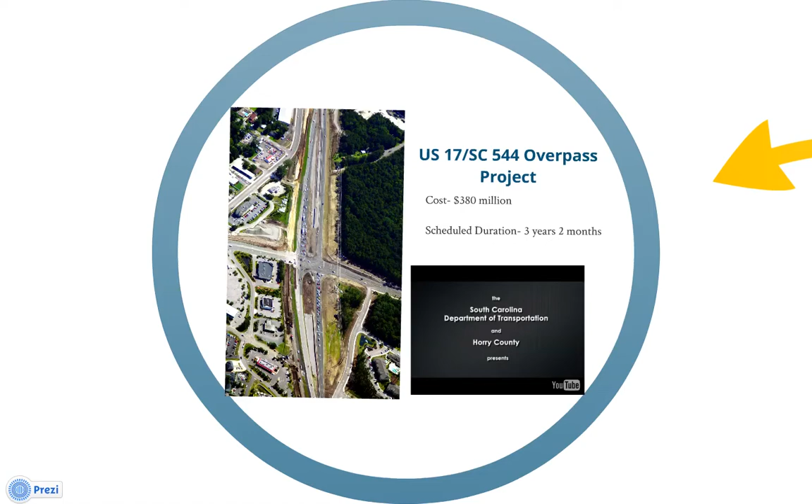This project is to maximize overpass sustainability. This overpass is located on the intersection of US 17 and SC 544 in Myrtle Beach, South Carolina. It has a budgeted cost of $380 million and has a scheduled duration of 3 years and 2 months, with it already being 1 year in construction. The following is a video.

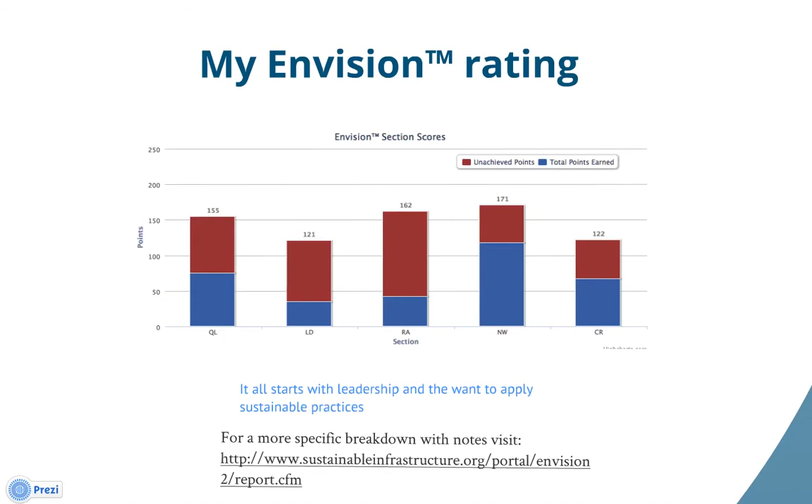How can we improve? It starts with a sustainable vision. Perhaps creating a design charrette, in which participants can create a concept map, and also then discover a form of biomimicry, such as water repelling off of leaves in comparison to water running into the drainage system.

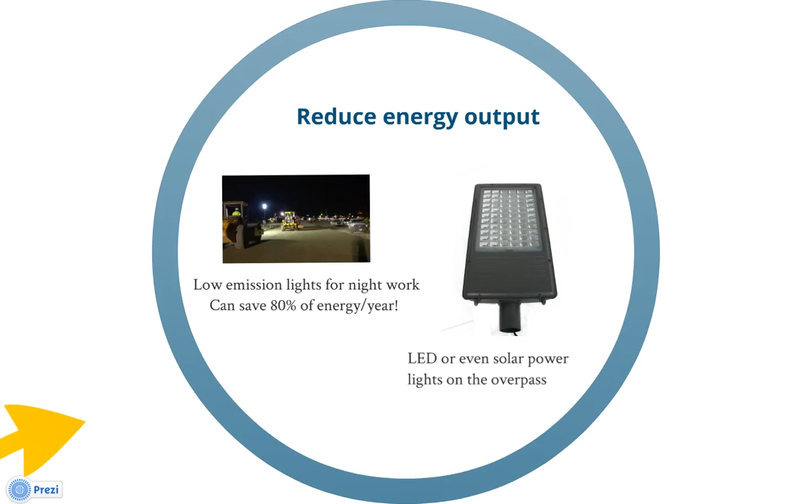We can also reduce the energy output, with LED lights being installed on the overpass. While working at night, low-emission lights could be used, and a saving of 80% of energy per year during night work.

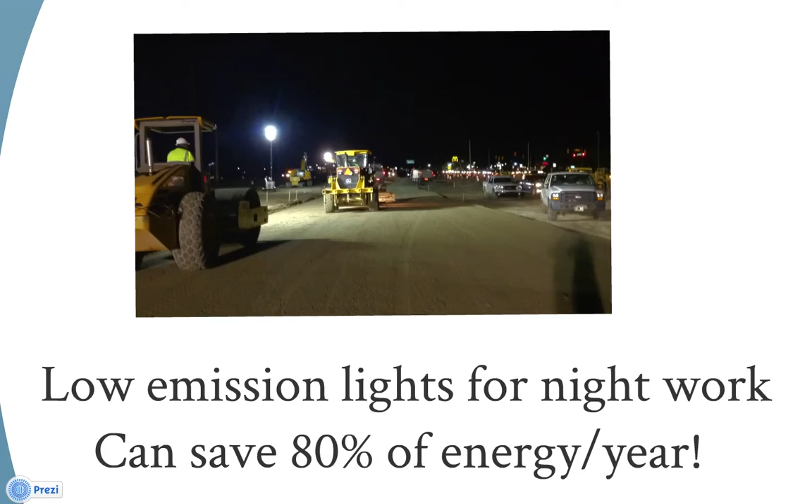We can also reduce the waste on the site. For example, in the picture shown with wick drains, at about 40 cents per vertical foot and 6 inches left above the ground, with over 5,000 installed, without 6 inches being left out of the ground, there can be a minimum savings of at least $1,000.

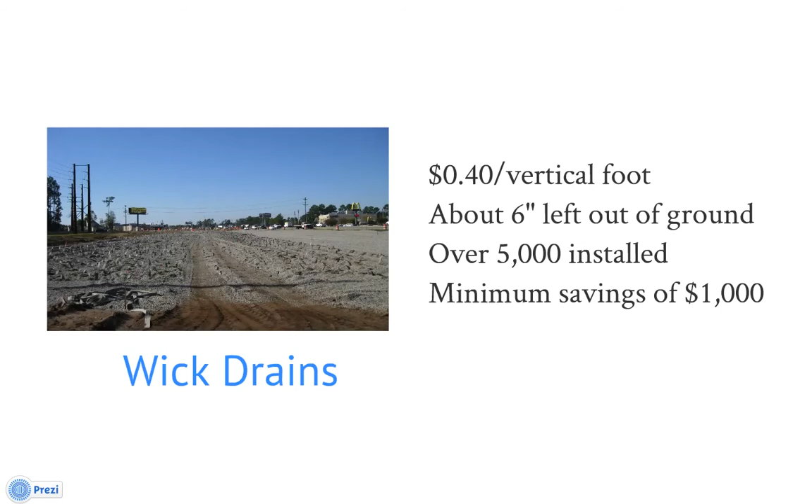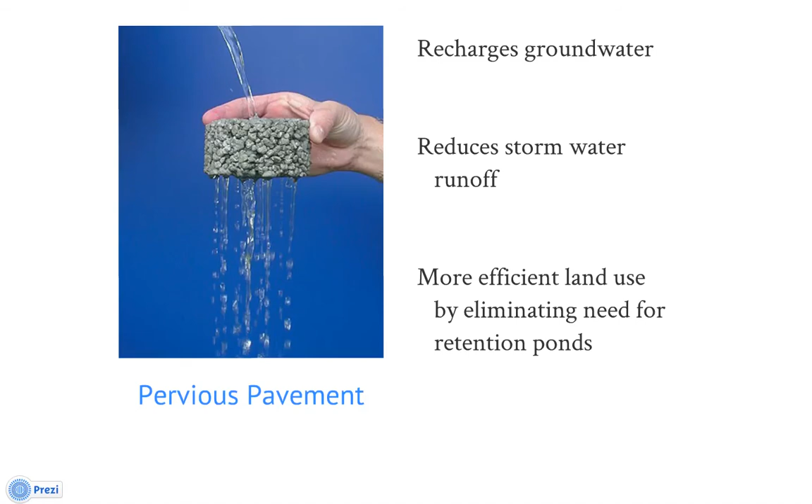In constructing the overpass, perhaps pervious pavement would be a good option. You could recharge the groundwater, reduce stormwater runoff, and eliminate the need for retention ponds. On the on and off ramps, perhaps even a bioretention system, which uses vegetation to remove pollutants from stormwater runoff and control the volume of flow. And this would reduce costs for filtration systems.

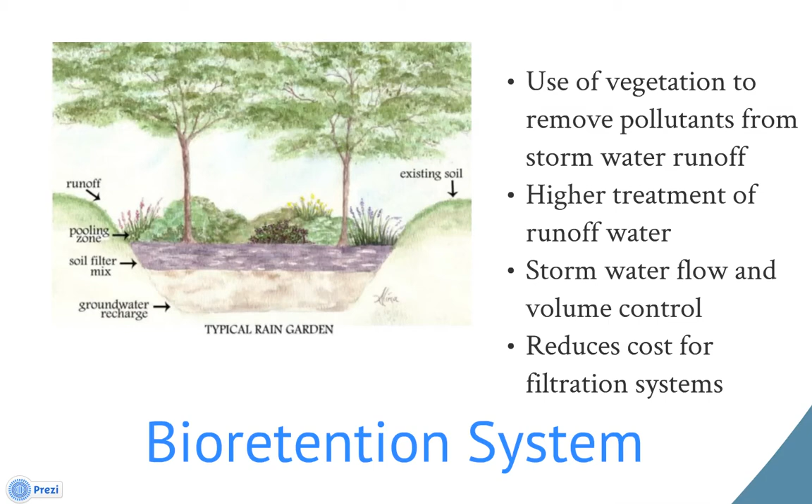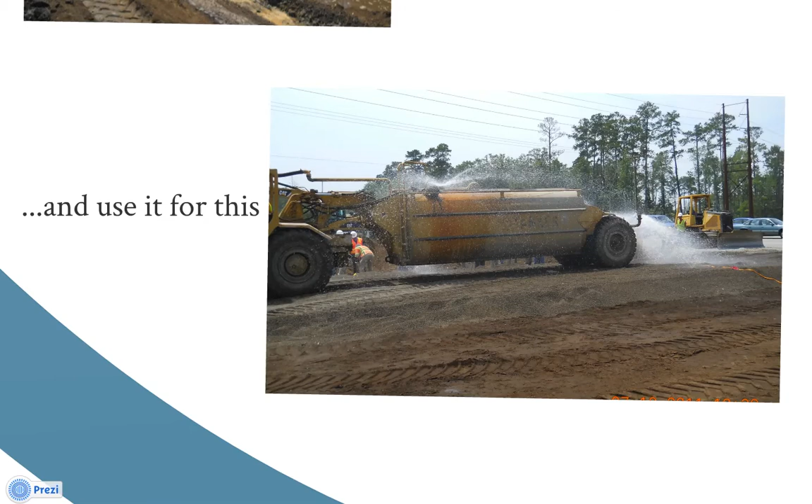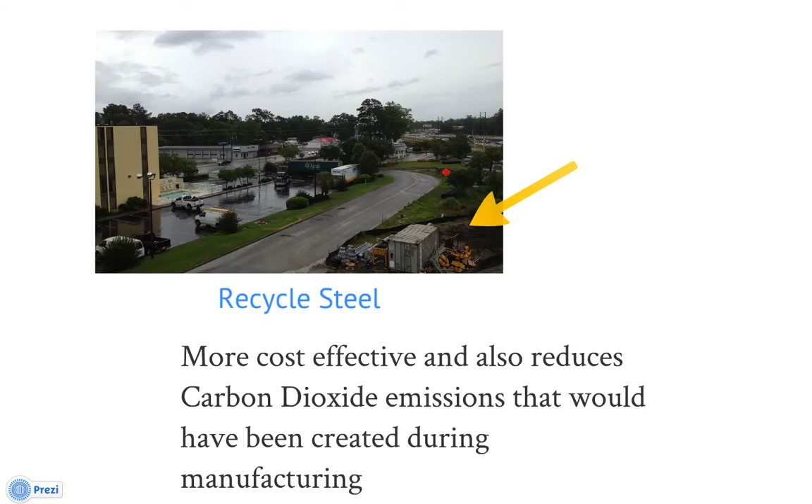Why not get this water that doesn't necessarily need to be treated and use it to compact this soil? In the bottom right corner, you can see wasted steel. It would be more cost effective to recycle it, which in turn reduces carbon dioxide emissions that would have been created had new steel been manufactured.

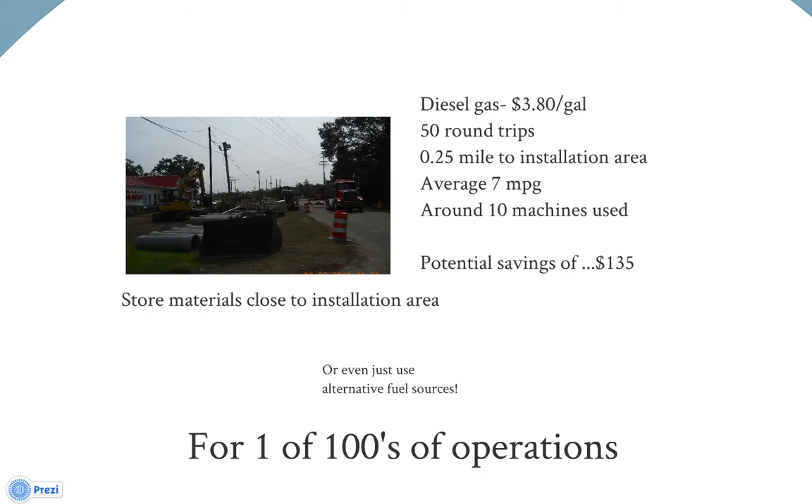Imagine the savings if this was done to hundreds of operations on the project, or you can even just use an alternative fuel source. There are many other things that can be done, but it all starts with leadership and a desire to be sustainable.

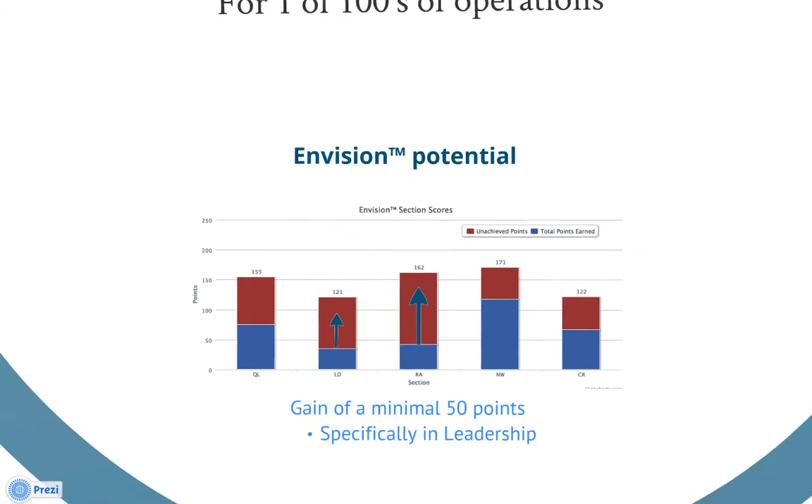Now let's look at some positives. Let's look at the life cycle assessment of the waste dirt. The supply is already in the ground, so it does not need to be produced. It will be transported using trucks, but there's no manufacturing. And the use of the waste dirt is to fill in the pond, therefore no disposal is required.

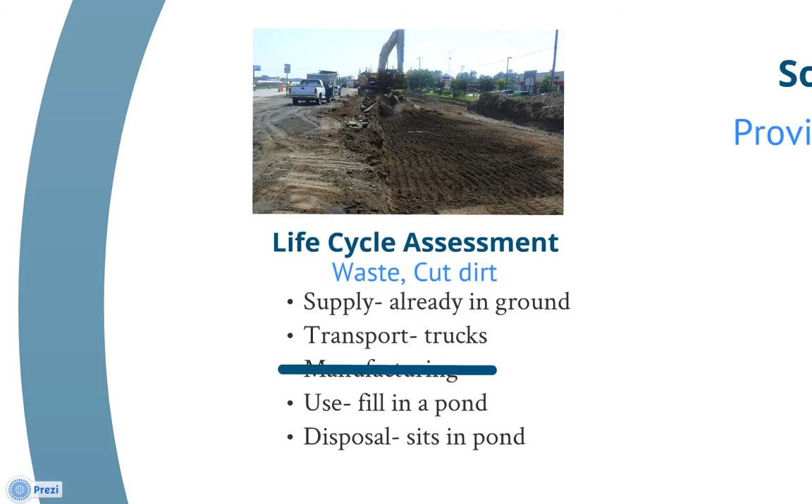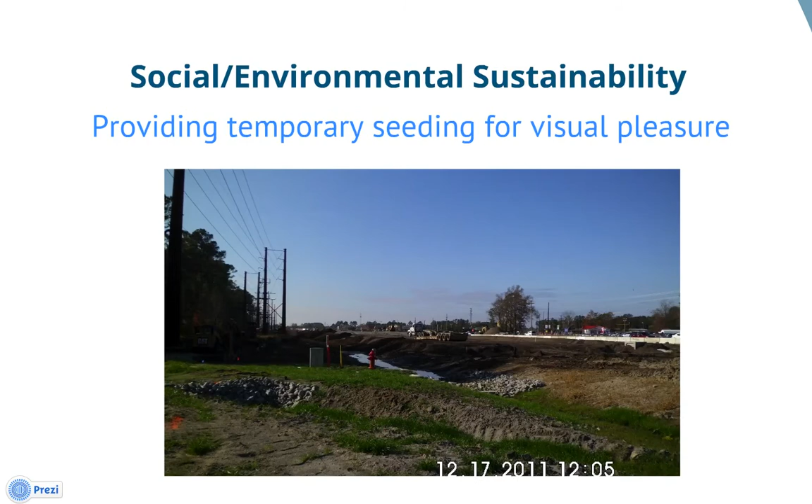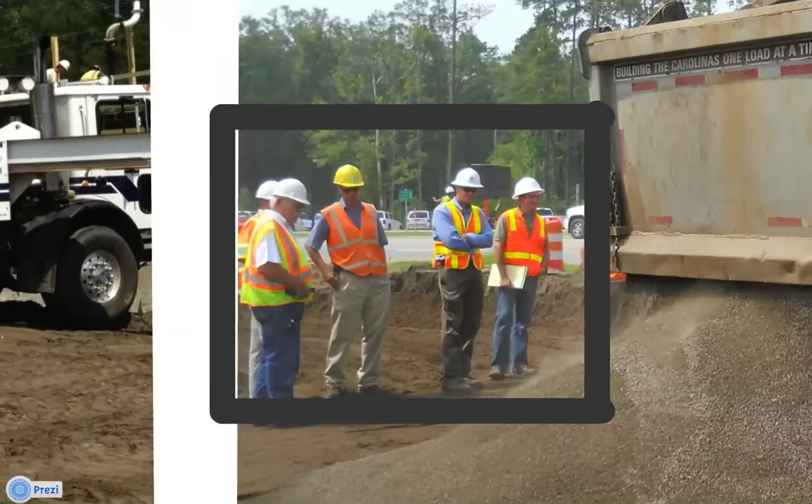In the aspect of social and environmental sustainability, temporary seeding is provided to motorists passing by to provide an aesthetic appeal during construction. The project also uses local resources, such as locally produced concrete only 5 miles away, and aggregate coming from the Grand Strand area. Not to mention all the contractors and subcontractors were hired within the Northeast South Carolina region.

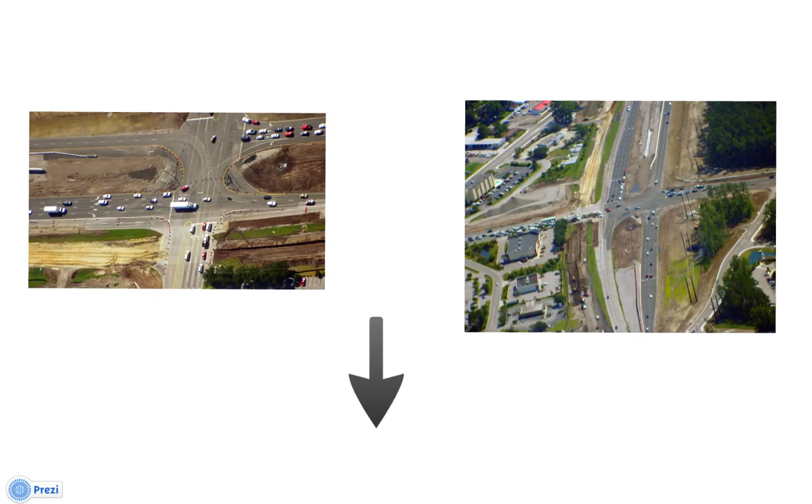The project may not look appealing now, however, it will not only improve traffic flow, but also stimulate business around the area.